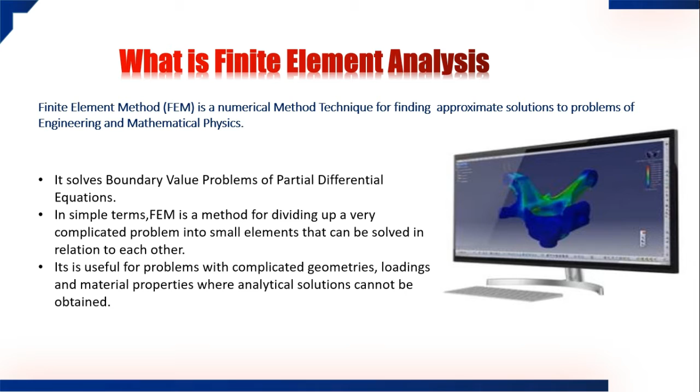Now, how does FEM work? FEM uses a complex system of points called nodes, which makes a grid mesh. In this individual grid mesh, we could see this body being subjected to some sort of force or load, and due to that, only this portion is getting distorted, and we could see a gradient varying from blue to red. If we see it minutely, we could see that there are small triangles into which this entire domain is broken down.

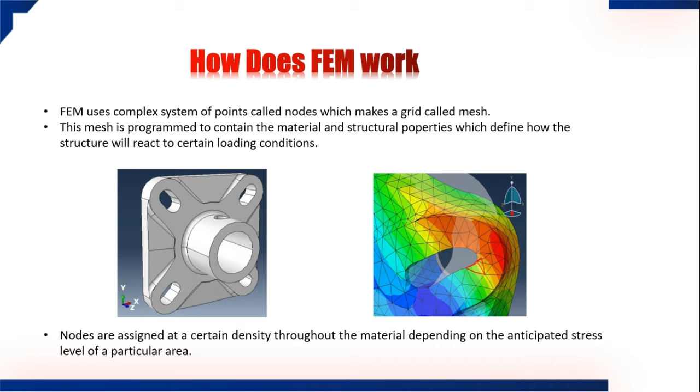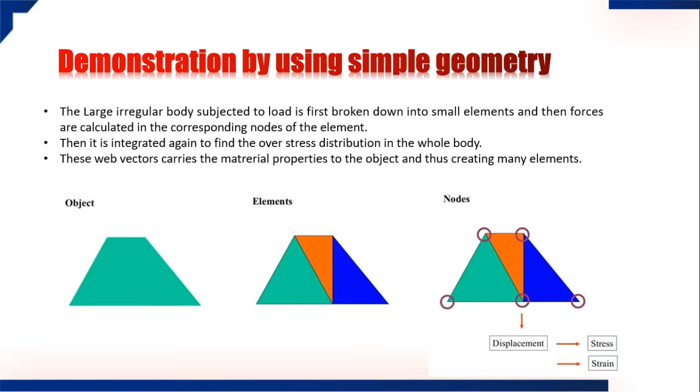So, what exactly does finite element do? In this figure, we could see this object is broken into three triangular elements, and the junctions of these elements are called nodes. At these node points, we could find the displacement, and correspondingly from the displacement value we could find out the stress and the strain values.

Now, types of engineering analysis. What are the different sectors where we could apply finite element method? We can use it firstly in structural analysis. Structural analysis can be done for both linear and non-linear models. In linear models the material is not plastically deformed, it is elastic deformation, and in non-linear it is beyond the elastic deformation.

We could see this cantilever beam, and we could see here the force is varying from blue to red, where red is the maximum force or the maximum load. We could see the color gradually varies as we move towards the junction point of the cantilever beam.

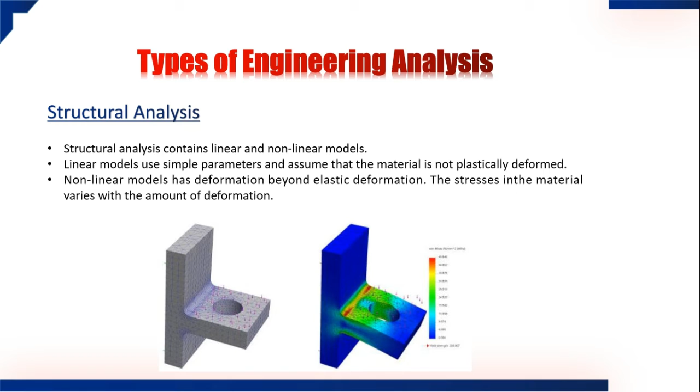Now, secondly, vibrational analysis. It is basically used to test the material under random vibrations, shock or impact. Bridges continuously face random vibrations, and sometimes this vibration can match the natural frequency of the bridge material, due to which resonance may occur and a catastrophic failure may occur.

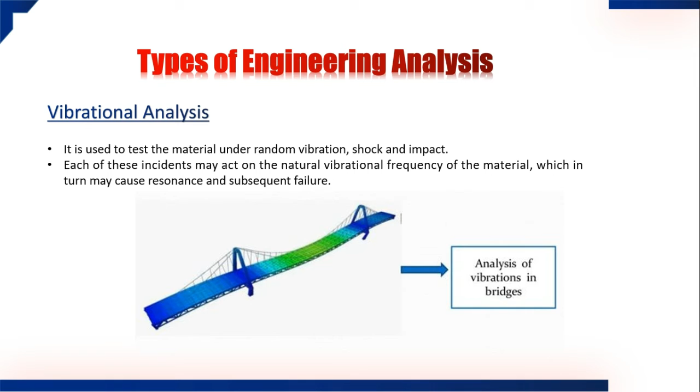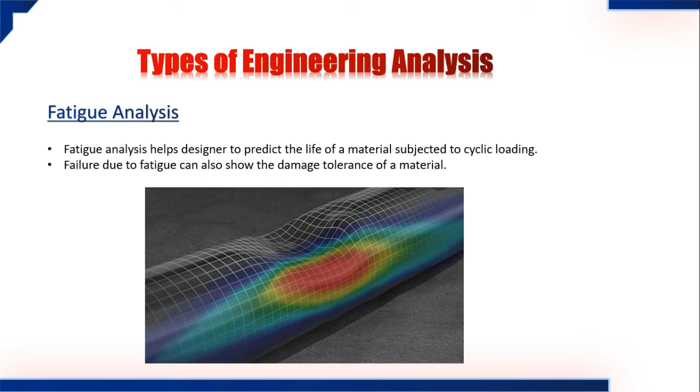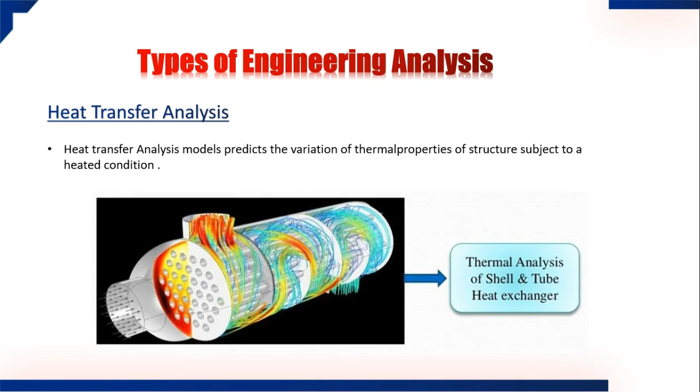Fatigue analysis is mainly used to predict the life cycle of a material subjected to cyclic loading. And we can also apply this to thermal analysis, where we will find the heat gradient of this system.

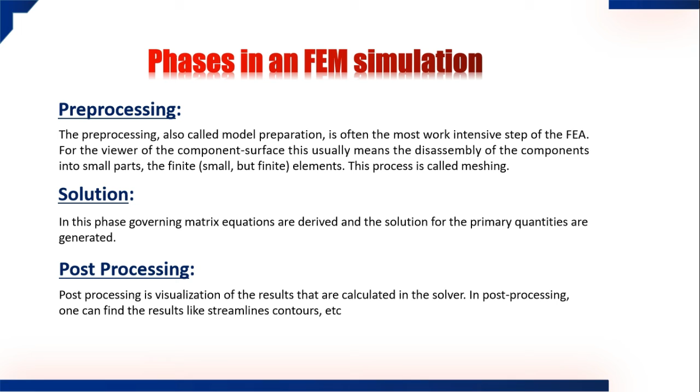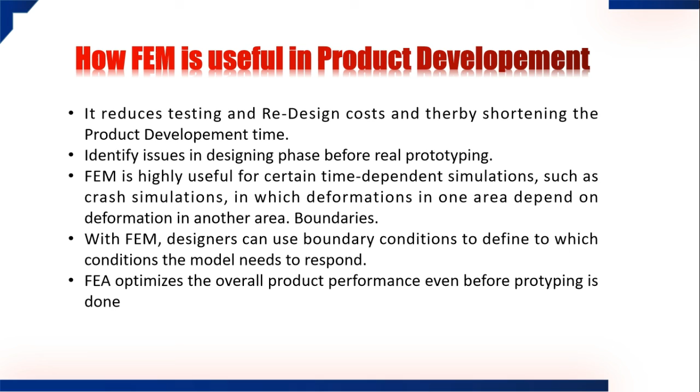FEM is highly useful for certain constrained areas. Suppose we have to simulate the crash of a car or an airplane; it is not physically viable to make a physical aeroplane and then do failure analysis. Here FEM simulation is very useful. It optimizes the overall product performance before prototyping.